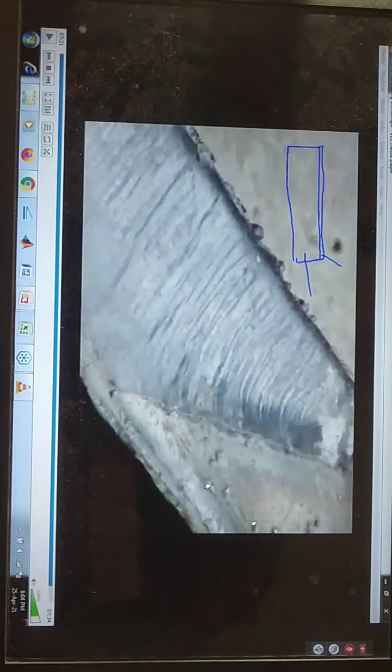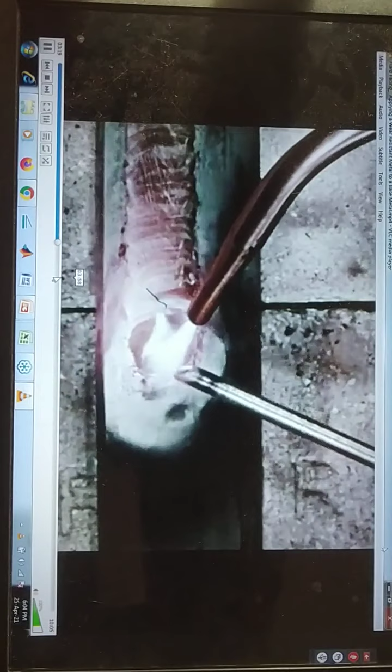So even on any product, we can deposit any costly material also. You can see here. So here it is. This is what I wanted to show you, how the welding process is used for cladding purpose. I hope all are getting it very clearly.

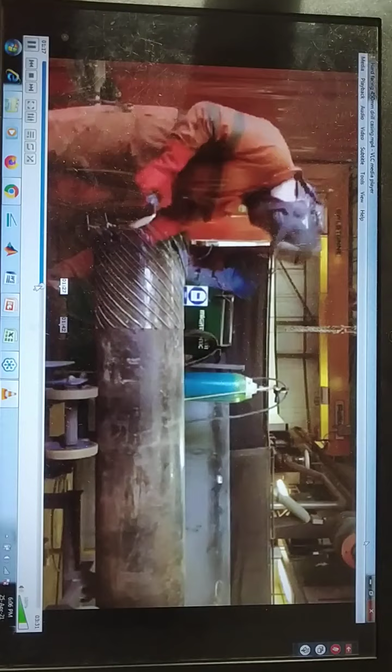So even the cutting tools will be provided with such cladding. Even the edges of certain products will be provided with such cladding, so that enhanced properties will be obtained there. Okay, so there are various. So quickly I am moving further.

Okay, so another one, the blades. Those angular blades will be provided with the coating. Quickly I am rushing through here. The teeth used in a bulldozer, that is also provided with hard facing. At least this part you might have seen.

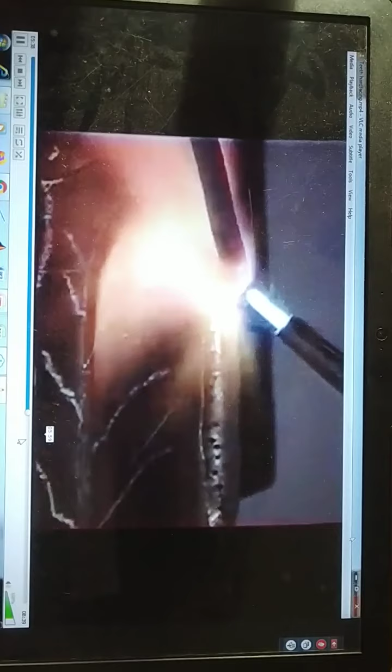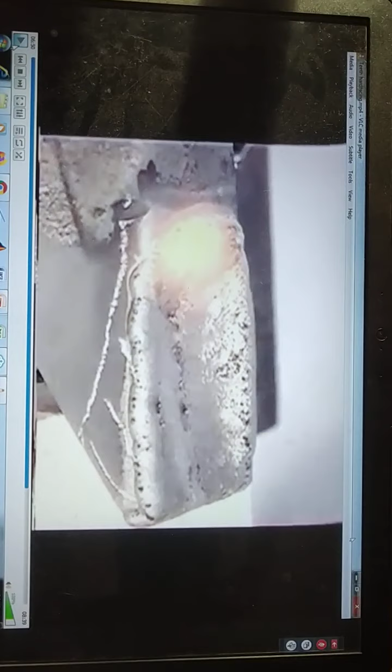Hello sir. Chalks that will be disappearing when some temperature is achieved, those are called temperature chalks. Those will be used to identify the temperature. And then later on machining will be carried out there. So this is how the cladding will be carried out.

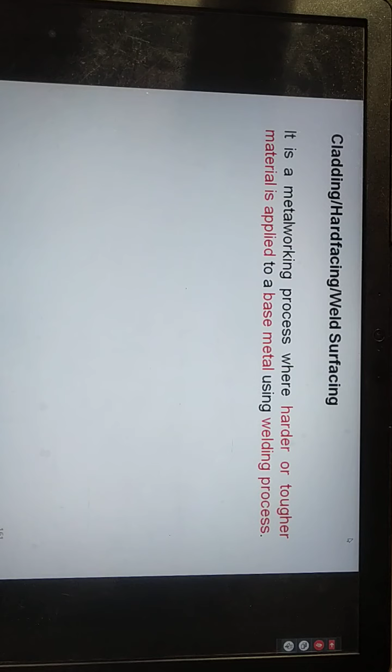So I request you that once the situation becomes normal and you come to the institute for some time duration, please find sufficient time to visit our advanced welding lab. There I will definitely try to show you the demonstration of such equipment. The welding process will be used depending on our requirement: manual, or some automated welding processes.

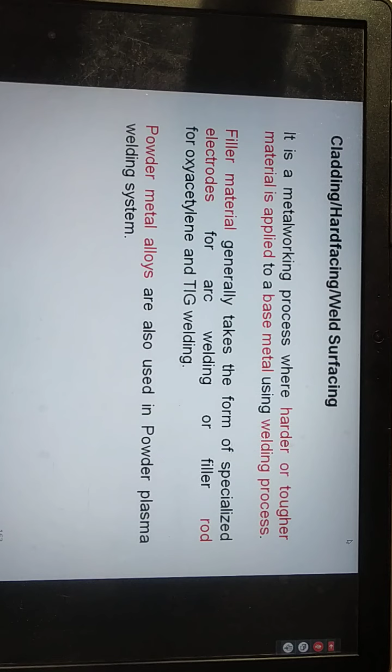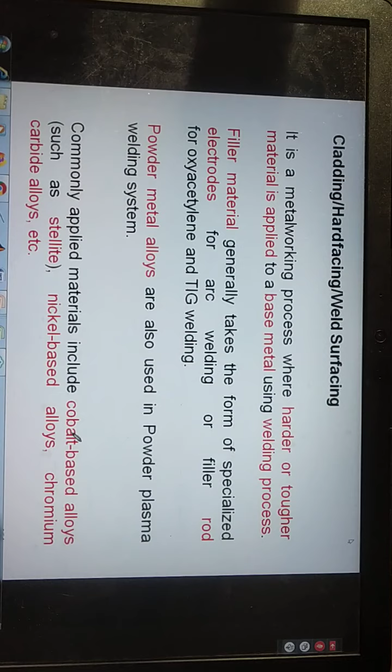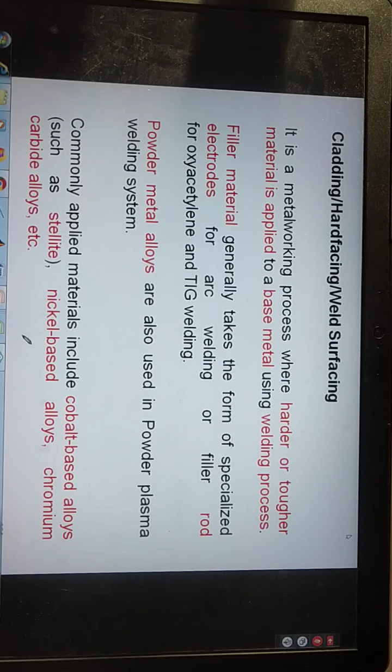You can see here the materials are very costly. In our case, we are using nickel based powder and cobalt based powder. Cobalt based powder is very costly, in the range of 8,000 to 10,000 rupees per kg. Nickel based powder is 5,000 to 6,000 rupees per kg, but required in very small quantity, and it will provide you a very good wear resistant surface.

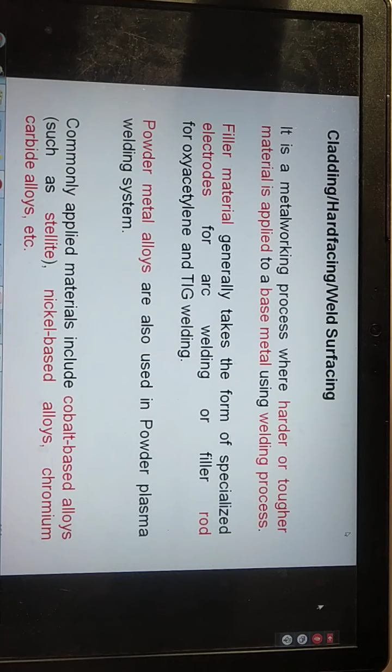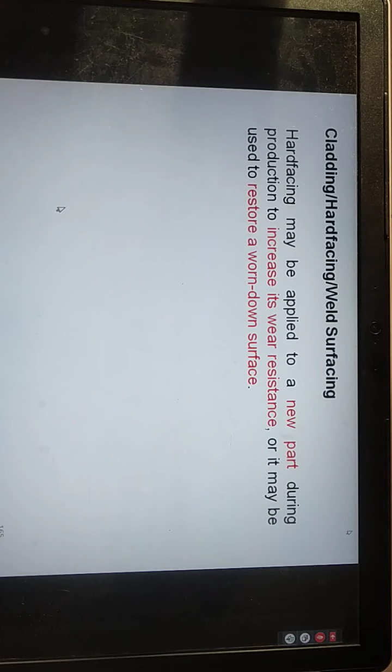We are having the wear testing facility also. After depositing it, the wear test will be performed to know the wear behavior of the obtained surface. Let me know if there is any doubt. These are the various welding methods we are having in the department. This will be used to melt the material and deposit thick deposition. This is for thick deposition.

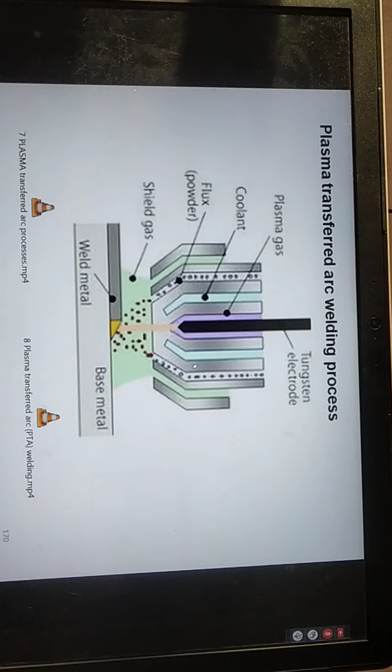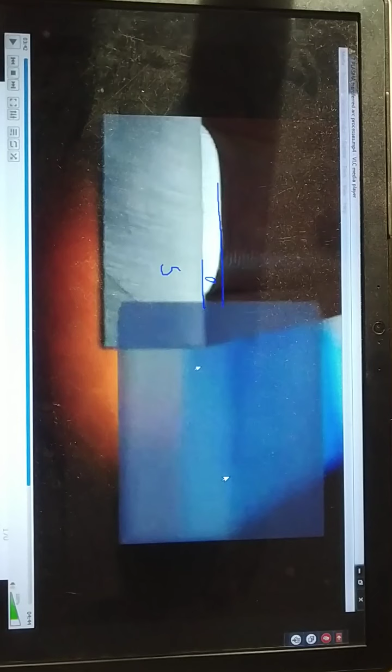So this is the entire setup of that process. The material will be melted and deposited on the surface, and continuously a linear motion will be maintained. You can see here a very good quality thickness of deposition will be obtained. This is your overlay material, and this is your substrate material. So quickly I am rushing through all this.

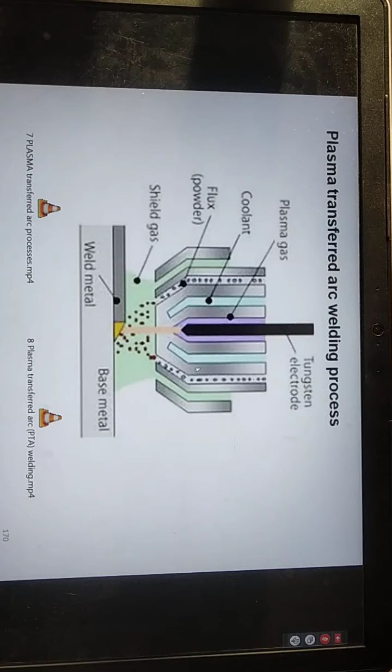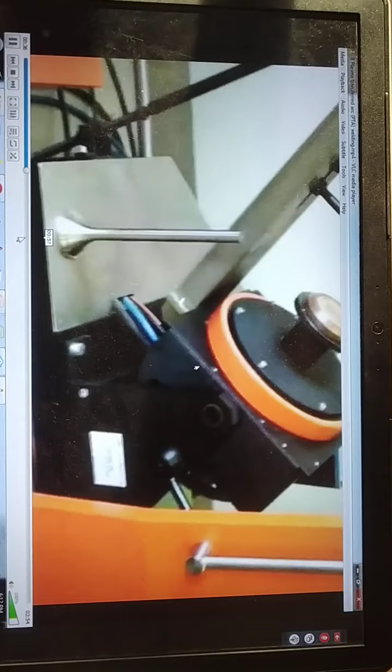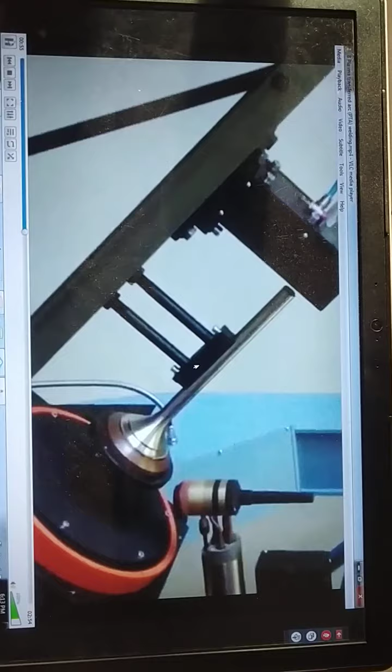So here, on this one small valve, you can first see that valve. This is one valve which is used in our IC engine, the inlet/outlet valve you might have seen. So here it is. I hope you are finding this product. This is your product, and on this product we are going to deposit the coating.

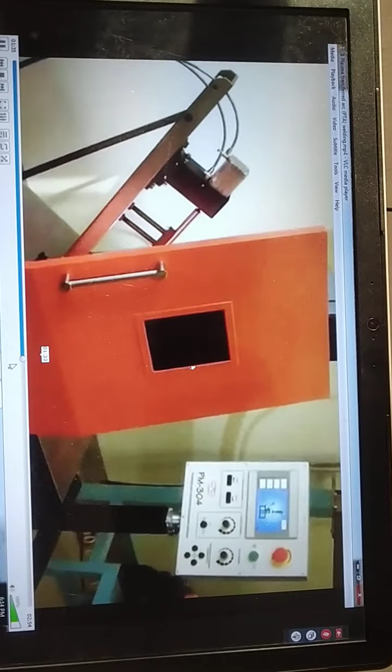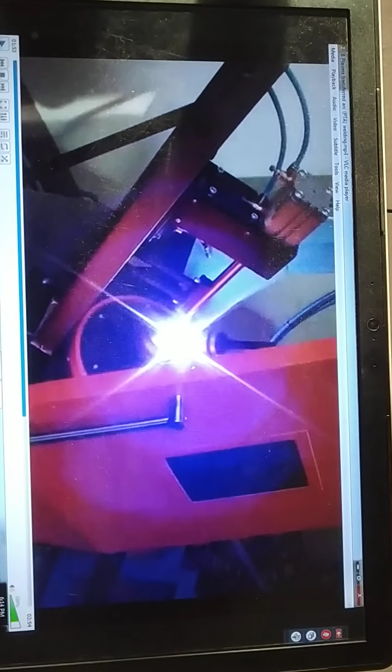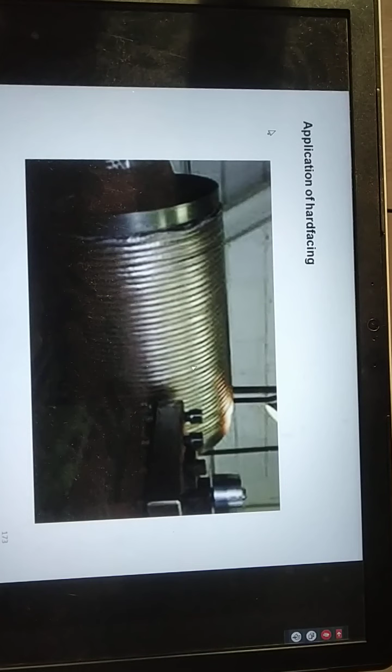So that movement of the nozzle you can see, and it is depositing. So I hope all are getting this. Okay, here it is on the cylindrical product, application of hardfacing, and you can see here. Even the big size products, they are provided with it. Then laser cladding is there. So the source, okay, that is laser cladding.

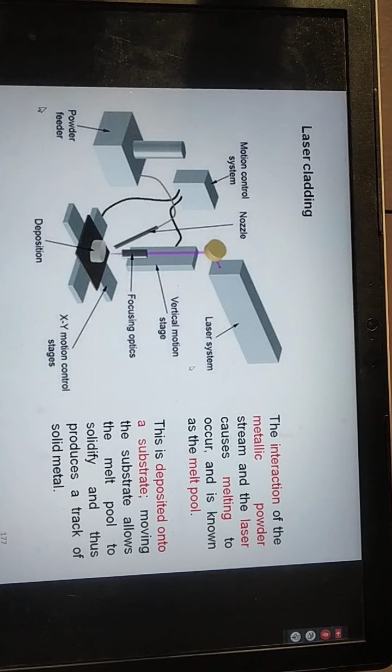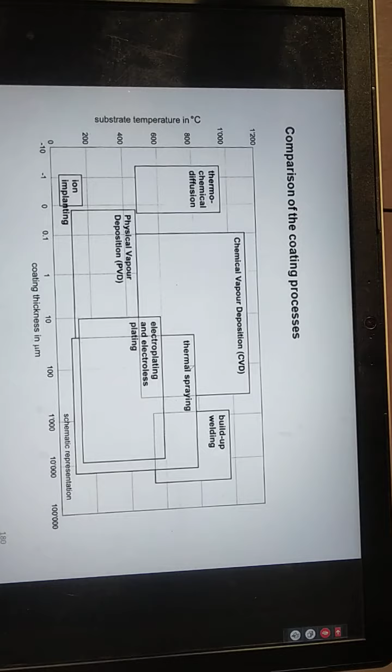So depending on that, it will be having its own advantages and disadvantages. So this is the comparison of different processes, the temperature obtained, the coating thickness obtained from microns to certain mm, the velocity obtained. So quickly I am rushing through this. I hope all are getting it. Then later on, if required, the testing will be carried out for that, but this is not required in our case, so we are not going to discuss it.

Then there are a few other miscellaneous processes that we may not go for. So any doubt to anyone regarding these coating techniques? Otherwise we can now proceed to the heat treatment of non-ferrous material, which we will see very quickly because already your basics are very clear. So it will not take more time.

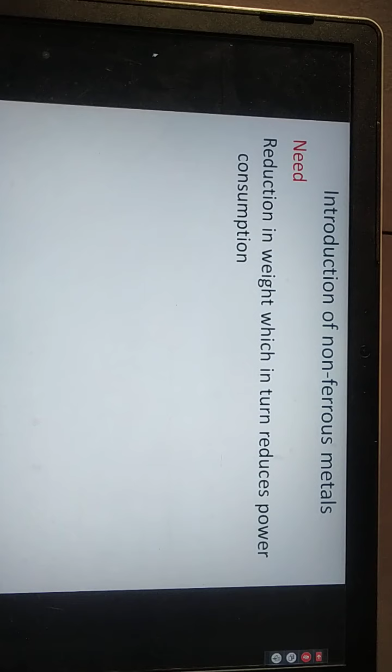So why we are going for it, the important thing is reduction in weight. We are trying to understand why we are shifting from steel to non-ferrous material, and once we have decided to make the product with non-ferrous material, we will select the mechanical forming process to make the product, and ultimately heat treatment has to be given. But this heat treatment will be a little different than the treatment given to steel.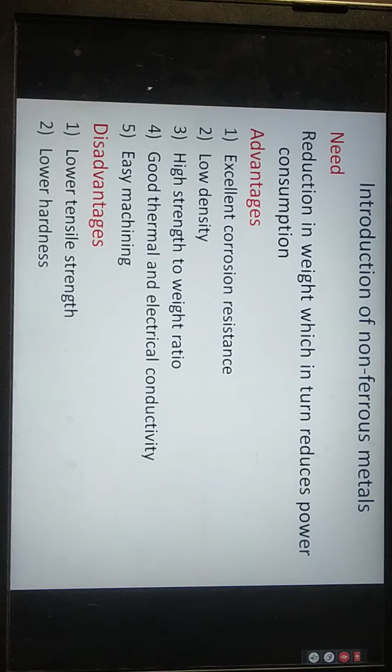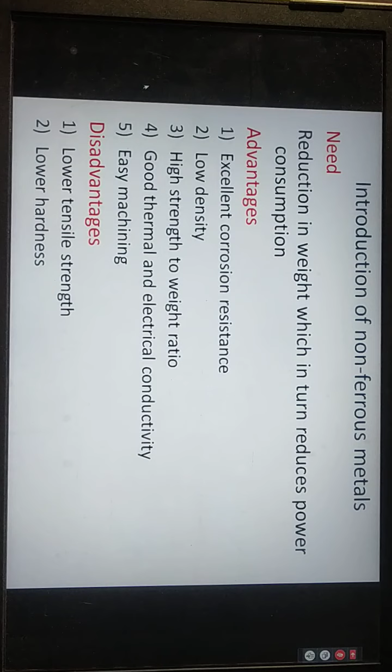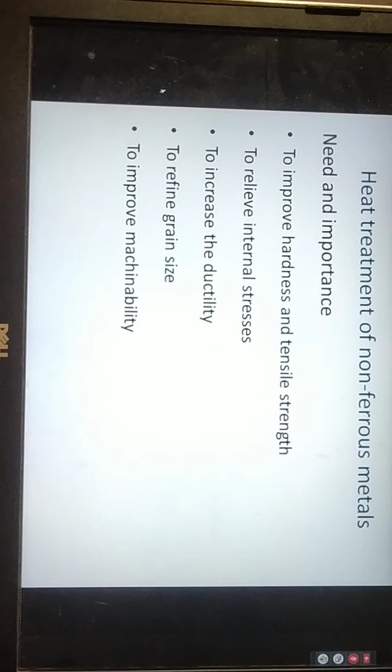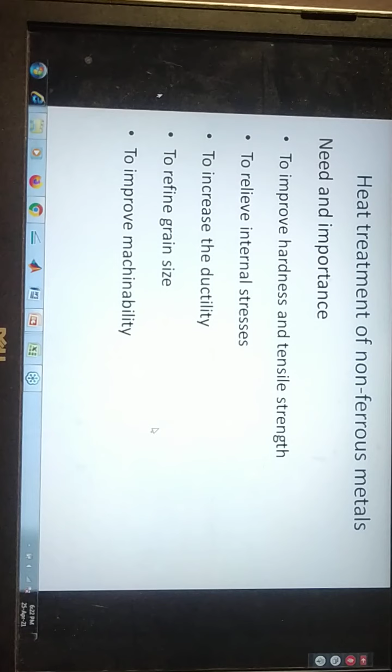So these are the various non-ferrous materials, not all. There are many different non-ferrous materials available. So need and importance: why heat treatment is provided to non-ferrous material. In a similar manner to ferrous material, we provide heat treatment to improve the hardness or, if required, decrease it. We had seen in steel also that with suitable heat treatment we either reduce or increase the hardness.

So to relieve the internal stresses, to increase the ductility, to refine the grain size, and to improve the machinability. These are the various purposes of providing heat treatment to non-ferrous material. Already we had seen this in detail in our steel segment, so that's why you can understand it quickly. Is it okay, Anugrah Pradhan?

So we will see heat treatment for different selected non-ferrous materials, okay, because there are huge non-ferrous materials available. Out of that we will see some of them, and one of them we will see in a bit more detail. So in the same way it will be applied in other cases also.

So tell me, in case of our plain carbon steel, while moving further to understand the heat treatment, we studied one important diagram. What is the name of the diagram for plain carbon steel? Nikhil. Yes, sir. What is the diagram which we studied before understanding the heat treatment of plain carbon steel? I don't remember. Oh, it is surprising, Nikhil. Anyone? Anugrah Pradhan. The iron carbon equilibrium.

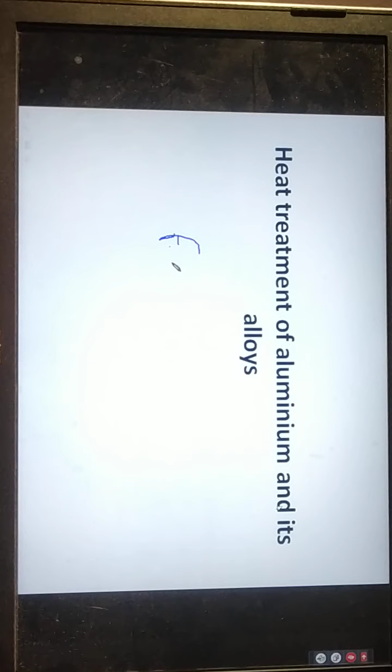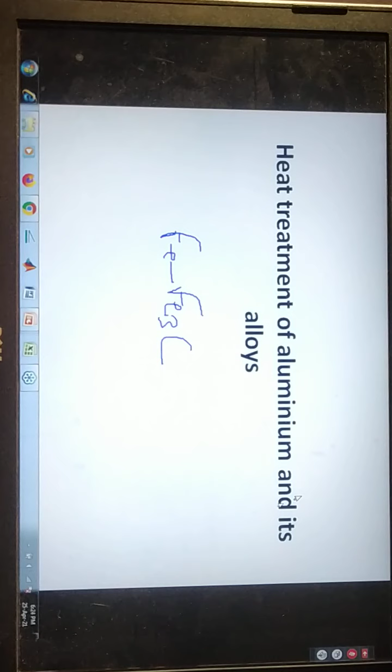Yes, okay. We studied the iron carbide equilibrium diagram. Nikhil, hopefully you know that diagram. Yes, sir, I was not sure this was the right answer. Okay. So yes, students are typing also. Yes, equilibrium diagram. In general, Shitanshu has given the answer. And in particular, it is the iron carbide diagram for plain carbon steel. Shitanshu, your answer is in general. Equilibrium diagram, that is also a correct answer.

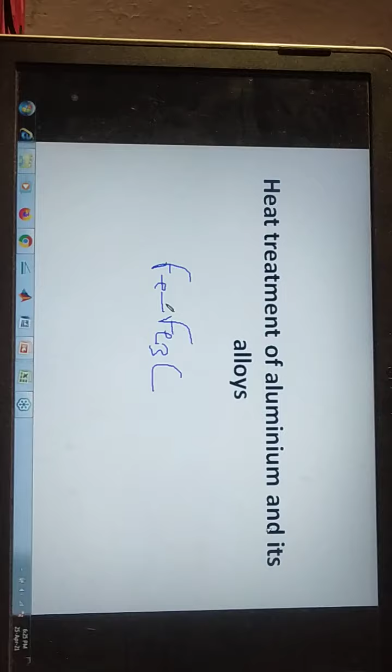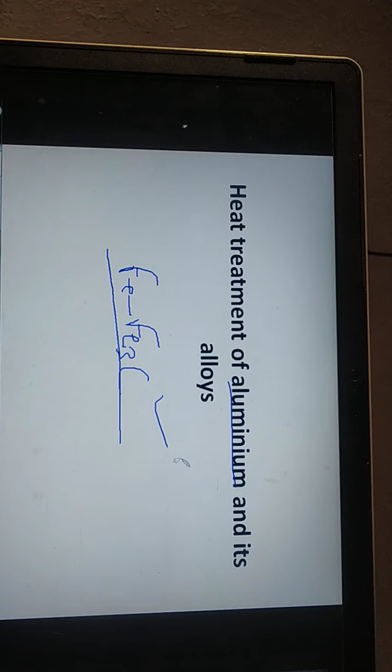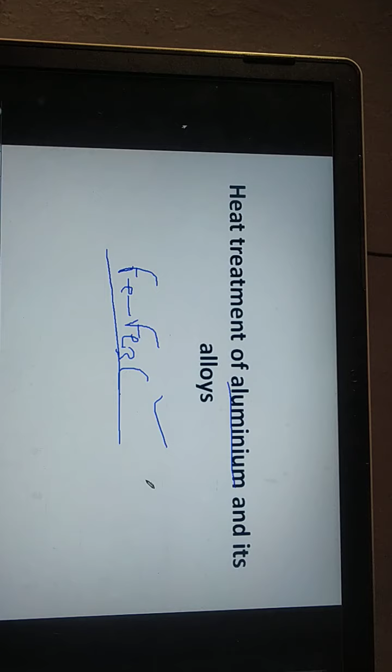Okay, so what should be the heat treatment temperature, or if the temperature is reduced, which phase will be present? That diagram gives us all these answers. How is that diagram obtained? Hello. Yes, sir. So, how? Yeah, sir. So researchers, they carried out... Okay, so there are huge equilibrium diagrams available, either binary equilibrium diagrams or ternary equilibrium diagrams, and depending on the requirement, we may use it. Tanmay, I hope you are getting it. What is that binary diagram?

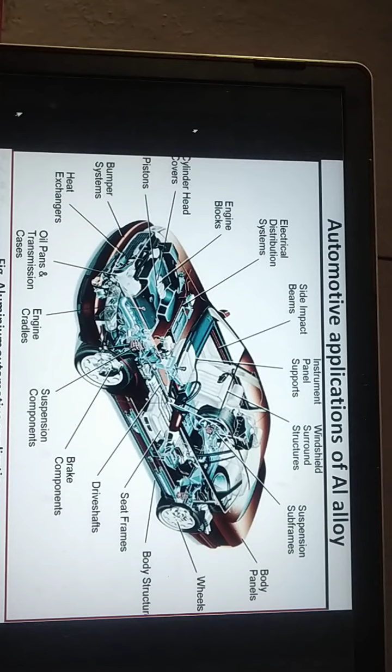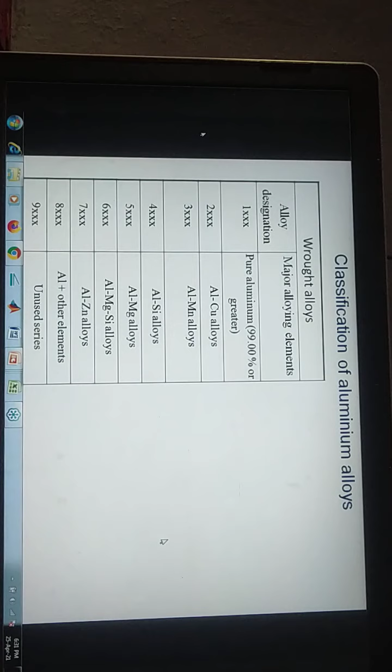Okay, so similarly these are wrought alloy and then the casting alloy, but almost उसमें कोई ज्यादा change नहीं है। To some extent some small changes there, but wrought alloy is only referred.

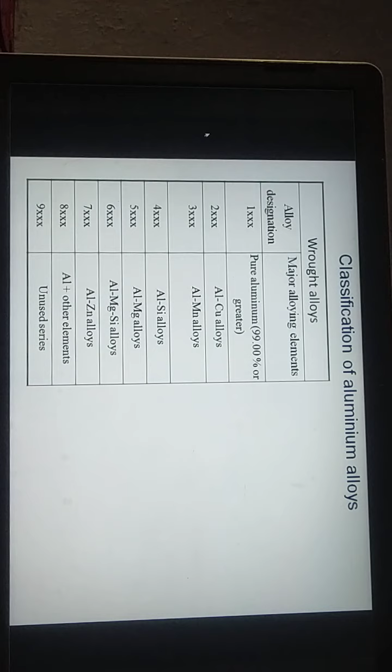So you can see here heat treatable aluminum alloys। This statement itself is sufficient for you to understand कि सारे एल्यूमिनियम अलॉयज हीट ट्रीटेबल नहीं है, लाइक इन केस ऑफ स्टील जो हमने देखा है, एंटायर स्टील इज हीट ट्रीटेबल। ओके बट अब यहाँ पर अलॉयज की बात है।

इवन अभी हम एल्यूमिनियम अलॉयज में एट प्रेजेंट हैं, बाद में हम दूसरे अलॉयज भी देखेंगे। तो देर आर ओनली फ्यू सीरीज विच इज हीट ट्रीटेबल, वो आपको यहाँ पर अभी समझना है।

Okay, so like I can understand the curiosity of Tanmay. Okay, so that is important here to know.

Okay, so here it is. I will provide the list also. So these are the alloys which respond to heat treatment.

So this is that series which is heat treatable. Tanmay, this is the answer. Yes, sir. 2000 series, 6000 series and 7000 series.

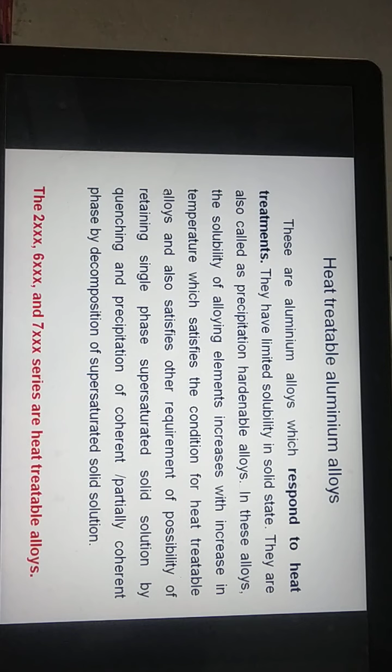ओके सर, गॉट इट। ठीक है, तो बहुत सारे एल्यूमिनियम के प्रोडक्ट आपने देखे होंगे, वो सीधा कट करके बस उसका कोई भी फ्रेम बना दीजिए, बट क्योंकि बेंड नहीं किया है तो कोई हीट ट्रीटमेंट की जरूरत ही नहीं है उसको। ओके सर। अनुग्रह इज इट क्लियर?

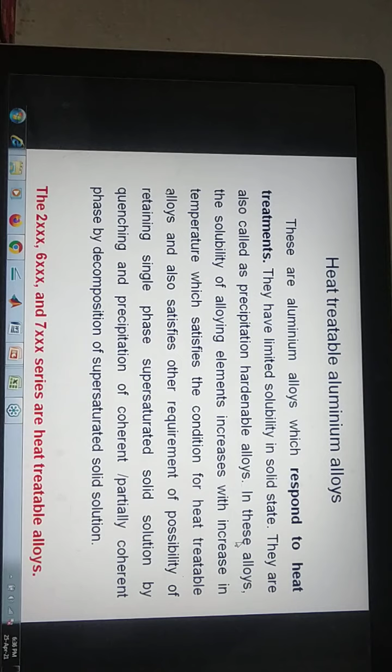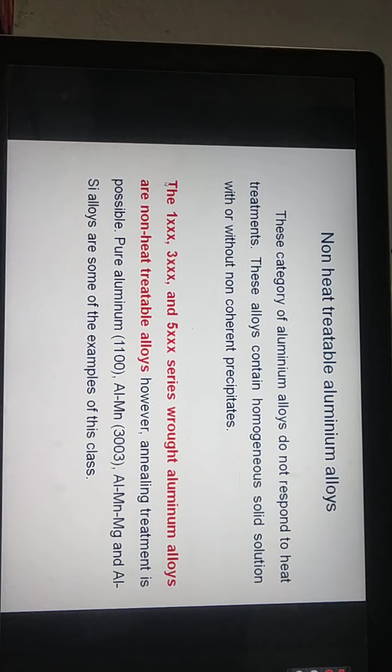Yes, sir. Okay, so let us see non-heat treatable। Okay, so these are those other, okay, which are not heat treatable, but it doesn't mean that those we will not use it। Okay, so यस, अब हमने जैसे कहा कि इसके लिए भी फेज डायग्राम अवेलेबल है।

Okay, so for aluminum copper, now let us say we are taking aluminum copper alloy। ओके, तो एल्यूमिनियम को

यहाँ पर भी आपको ये देखिए, अब यहाँ पर वेरी मच सिमिलर टू आयरन कार्बन डायग्राम, दिस इज द बाइनरी डायग्राम फॉर एल्यूमिनियम एंड कॉपर। अब हम इसके ज्यादा डिटेल में नहीं जाएंगे बिकॉज़ ओके, एटलीस्ट यू हैव टू अंडरस्टैंड कि आपके पास जो मटेरियल अंडर कंसिडरेशन है उसका बाइनरी डायग्राम आपको यूज करना है।

Okay, so all those diagrams are available in industries in the form of those handbooks.

So this is the binary diagram for aluminum copper. You can see here on the x-axis copper percentage. On the right hand side it is increasing.

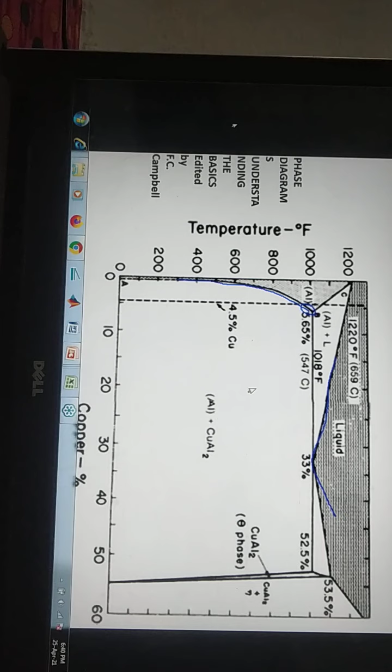In our iron carbon diagram, we had seen one name called pearlite, one name called ledeburite, which is nothing but a combination of those two phases.

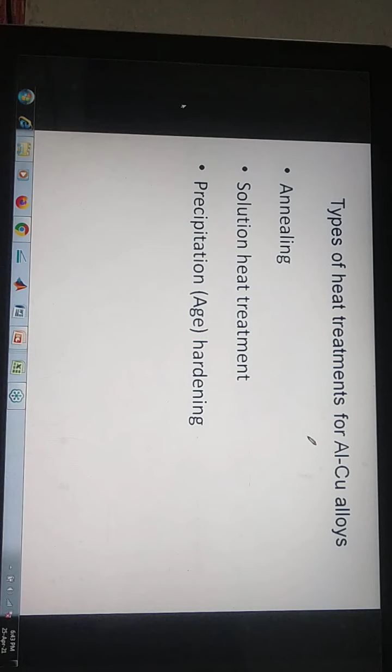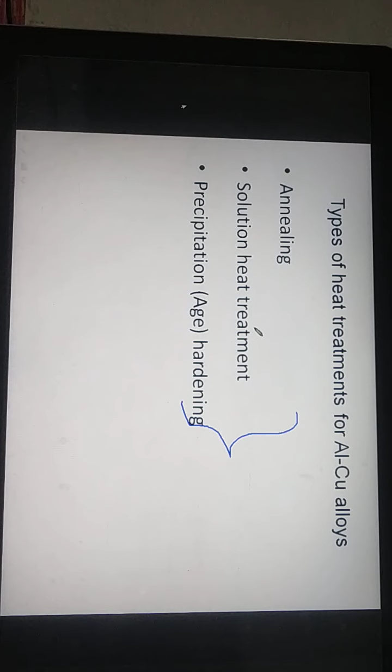Now I will explain this knowledge in a very simple way. I will just explain these three very easily and then you will see those remaining alloys also, almost the same heat treatment processes apply. For other alloys also, only this, except the heating temperature will change, but in most of the cases these are the processes applicable.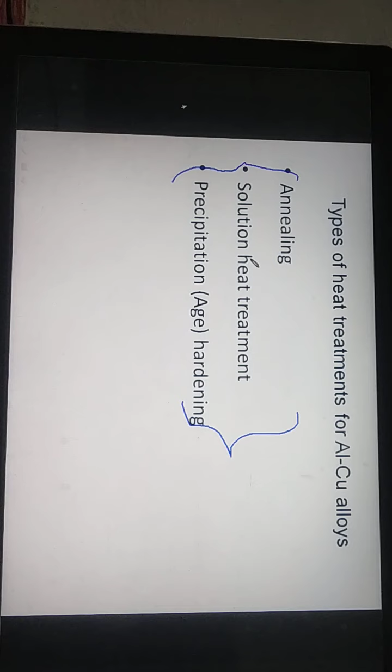So this is our point of discussion. So for the next 10 minutes we will discuss these three processes. It is better that you write down the important keywords, major changes, and then once you understand this, the rest will also be easy for you to understand.